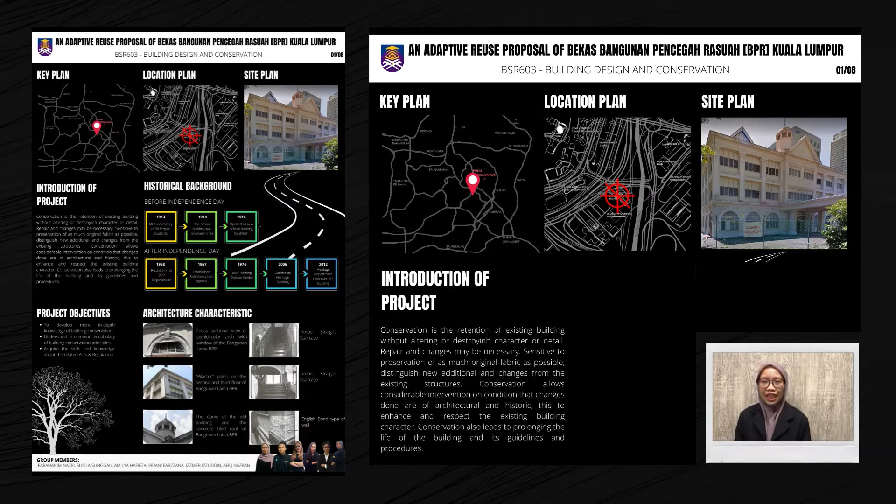There are two types of historical background of the building: before Independence Day and after. Before Independence Day, in 1913, the BPR building was used as the Methodist Girls' School (MGS) dormitory, which could occupy approximately 90 students. After a year, an unfortunate incident happened when a fire accident occurred in 1914, and the only part of the building that remained was the ground floor.

The principal worked so hard to raise funds for the reconstruction of the building. After a while, the building reopened as a new school building by the British. It was the first Women's Foreign Mission Society building to be built on fully collected financial aid.

After Independence Day in 1958, the building was established as the Bangunan Pencegah Rasuah organization. After some time, it was established as the anti-corruption agency by the cabinet in 1967. There were several renovations made between 1970 and 1972, where the original asbestos roof was converted to a concrete tile roof, which was done back in the 90s, followed by the renovation of windows, adding air conditioning, more dormitory rooms, as well as an awning at the entrance of the building. In 1974, it changed to the BSN Training Division Center.

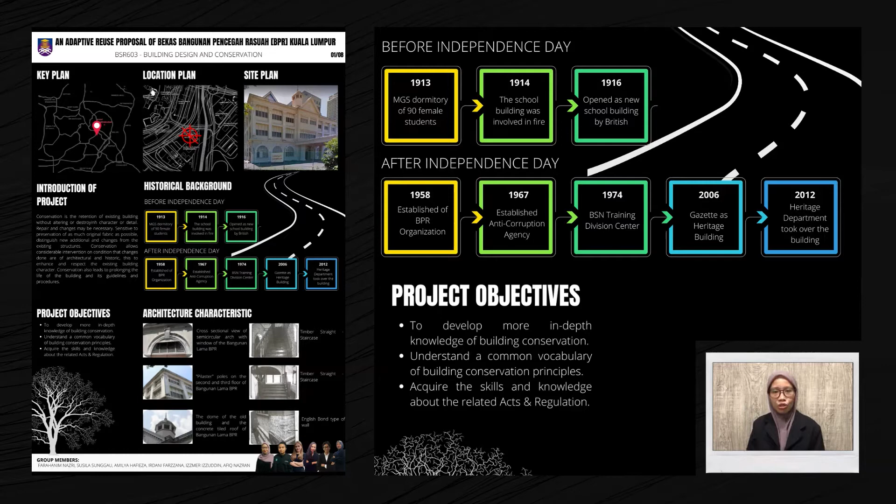For architectural characteristics, there are a few we could find in the BPR building. As for the exterior, there are three different types of characteristics. First is the cross-sectional view of the semicircular arch with windows of the building. Next is the pilaster poles, located at the second and third floor of the bangunan lama BPR. The last characteristic for the exterior is the dome, located at the center of the roof.

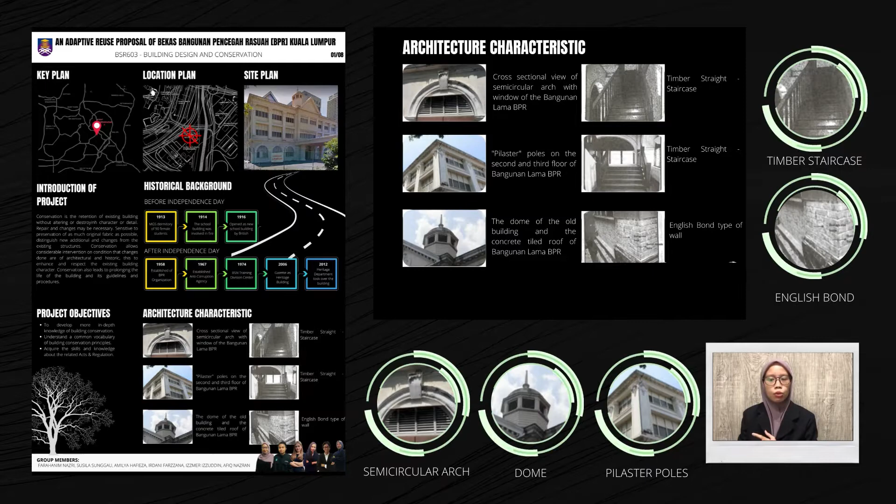For adjacent buildings, bangunan BPR lama is surrounded by some buildings and infrastructure. For example, the Asian International Arbitration Centre, which is only 4 minutes by car and 3 minutes walking distance, while Telekom Malaysia Brickfield took 5 minutes by car and 2 minutes walking distance. There is also Stesen Kereta Api Tanah Melayu and also bangunan Public Bank, which took 5 minutes by car and 2 minutes walking distance.

For the method and technique of the major work on the building, we decided to do strengthening on the timber floor.

As we propose to adapt the building into a hotel, the floor needs to be strong enough to support the elements added in the building. We have decided on two methods of strengthening, which are cross-laminated timber floor and timber concrete composite floor.

Between these two methods, we conclude that timber concrete composite floor technique is the best and most suitable to be used for this building. Basically, timber concrete composite floor (TCC) provides an efficient solution for improving the seismic response of masonry buildings in which timber floors are generally used.

TCC commonly consists of a thin concrete slab connected to the timber beams by connectors. Steel collar connectors are appropriately conceived for surrounding the timber beam, avoiding any drilling into the wood. It is composed of a part bolted at appropriate wings, with the superior one purposely welded with studs working as connectors.

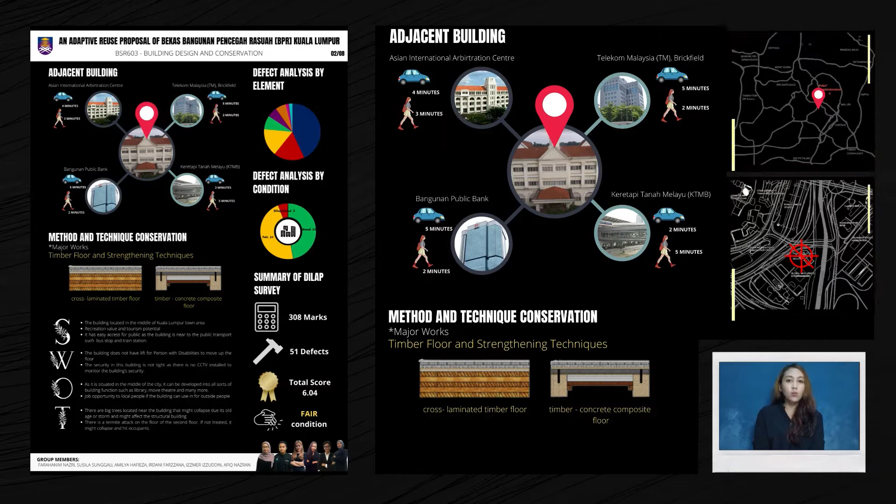A rubber layer interposed between the collar and beam can both reduce damage to the beam surface and ensure the adaptability of the system to irregular surfaces if applied to an existing beam. Friction at the wood-steel surface is guaranteed by bolt tightening.

Next is defect analysis, defect by element. As you can see, the blue color has the biggest percentage in the chart. The element that is mostly exposed to defect is the wall, with the highest percentage, which is 43%.

The second highest element affected is landscape, in color red, which is 17%. The third highest is roof, which is in color yellow in the chart, representing 16% of the defects in the building.

The least element affected by defect is door, which is only 2% overall.

Defect analysis by condition: there are a total of 51 defects. Both good and fair condition have the same total of 24 defects each, and another 3 defects are in poor condition.

For SWOT, the strengths are: the building is located in the middle of Kuala Lumpur town area with recreation value and tourism potential. It has easy access for the public as the building is near the bus stop and train station. Next, the weaknesses of the building are: the building does not have a lift for persons with disabilities to move up to the floor.

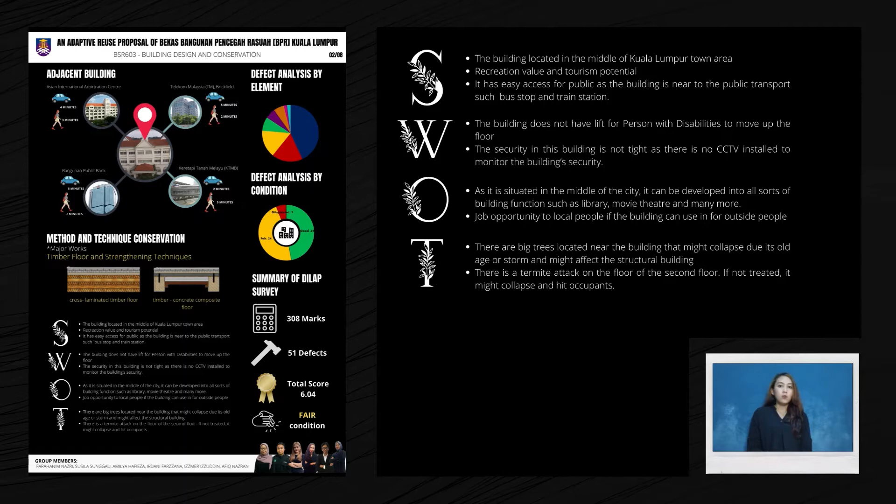For the threats, there is a big tree located near the building that might collapse due to its old age or storm, which might affect the building's structure. Also, there is a termite attack on the floor of the second floor. If not treated, it might collapse and it is not safe for all the occupants.

As you can see on this board, it shows all of the original plans of the Bangunan Lama BPR. On the left side of the board are the original floor plans for each floor, starting from the ground floor to the uppermost top floor.

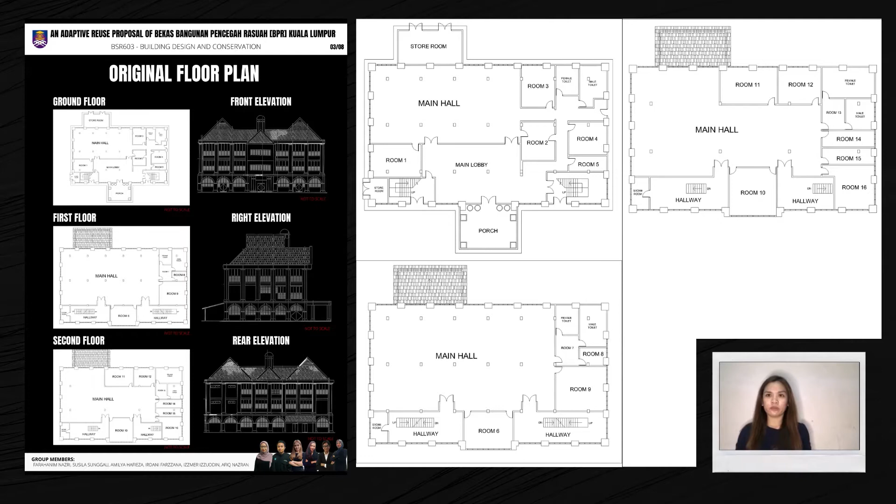While on the right side, it shows all of the elevation plans of the current Bangunan Lama BPR. It starts with the front elevation of the building, followed by the right elevation, and ends with the rear elevation of the building. All of the elevation plans are not to scale.

And now I will be presenting about the proposed design idea of our Heritage Grand Hotel. So firstly, I'll be talking about the introduction of the proposal.

The new proposal redefines the value of this building as a delicate craftwork with historic memory. The concept of addition serves as the medium between the occupants, context, and the heritage itself. We rearrange the layout and expand the spaces with additional volumes.

So as for the concept of the hotel, we chose the Heritage Hotel. The theme for the interior of this Heritage Hotel is the English interior. The English style interior is a common name for various trends in design and architecture. It was developed back in Great Britain from the Middle Ages to the present.

So as for the guidelines and conservation principles for the hotel, the conservation of the building will be strictly conducted according to the guidelines and principles of heritage buildings.

There are a few main points of the conservation works: firstly, retaining the authenticity; next, minimizing the intervention; then, cost-effective economic regeneration; and last but not least, community-based sustainable development.

Now I'll be talking about the proposed recommendations. The proposal is to structurally strengthen and restore the originality of the building.

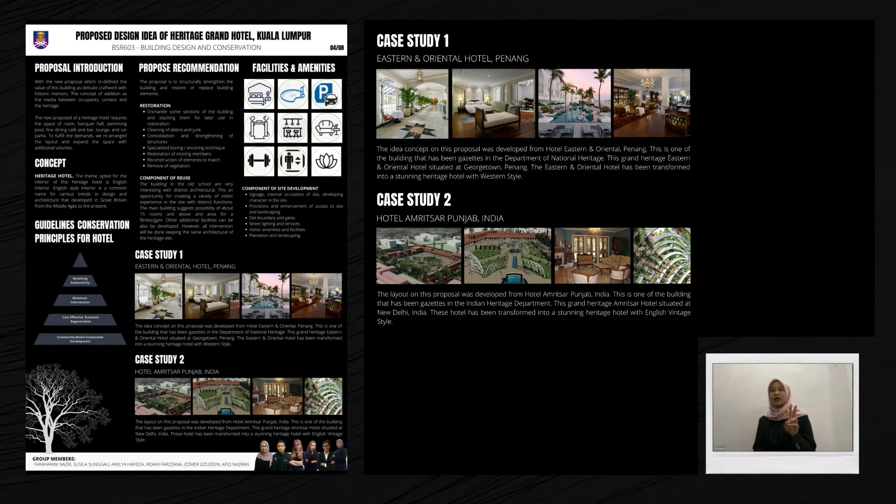There are a total of 24 rooms with 5 types of rooms available. For the first floor, it consists of 12 rooms in total: 4 rooms of type A, 4 rooms of type B, 2 rooms of type C, and 2 rooms of type D. Whereas for the uppermost floor, the second floor, it also consists of 12 rooms: 4 rooms of type A, 2 rooms of type B, 4 rooms of type C, and 2 rooms of type E.

For the ground floor, there will be a lounge area, reception, toilet, office, and cafe. We also added a new additional building at the back of the building, which includes a bar, spa, sauna, gym, service room, hall, and swimming pool. There are a total of 24 rooms with 5 types of rooms available.

Next, the first floor will consist of 12 rooms: 4 rooms of type A, 4 rooms of type B, 2 rooms of type C, and 2 rooms of type D. And lastly, for the second floor, also consisting of 12 rooms: 4 rooms of type A, 2 rooms of type B, 4 rooms of type C, and 2 rooms of type E.

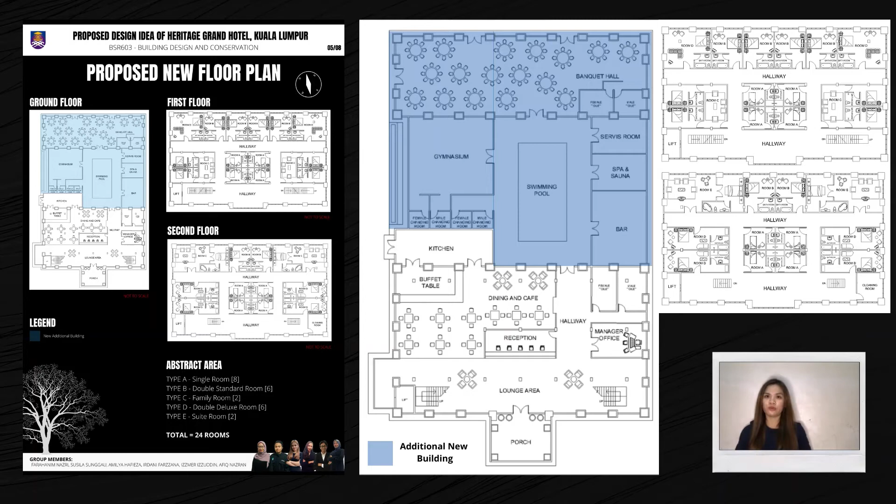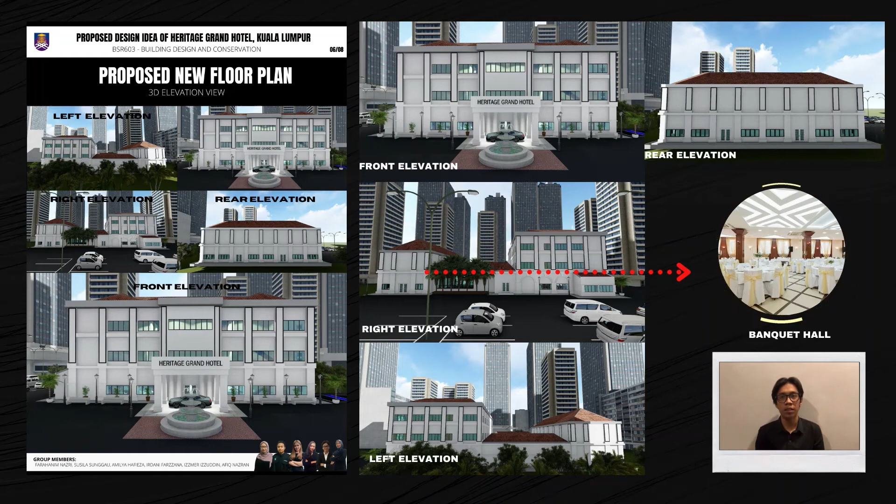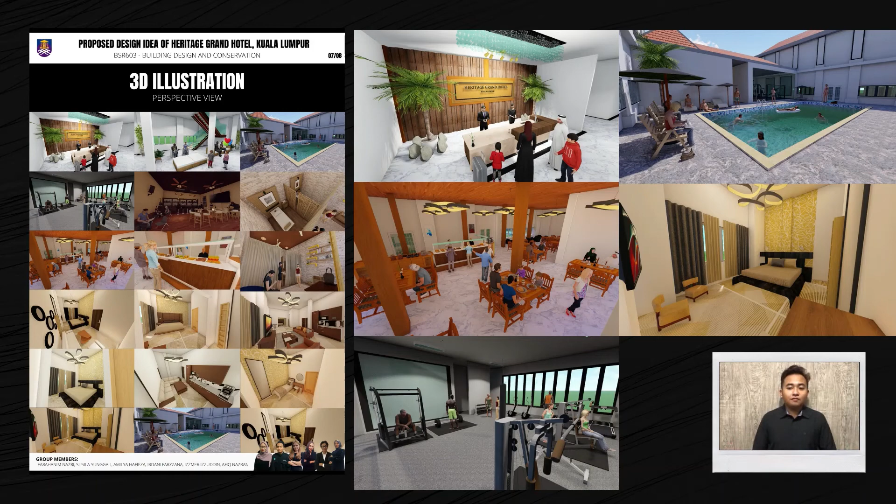In this Heritage Grand Hotel, they have a single room, double deluxe room, suite room, family room, and double standard room, totaling 24 rooms in this hotel. For the detail of the visualization for the proposed design idea of Heritage Grand Hotel Kuala Lumpur, let's look inside.